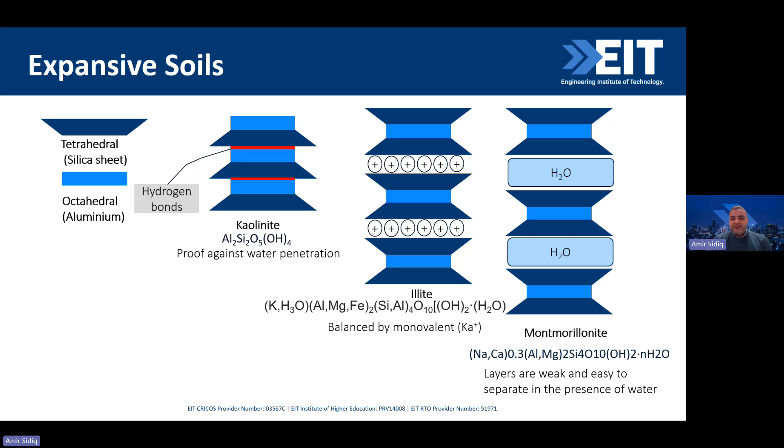So this is a schematic diagram that represents the swelling behavior. Consider we have these different layers or molecules of the clay at their original state. With the addition of water, what happens? These particles of clay get away from each other because the space between them gets filled with water.

Now, considering the same mass of soil, when it's drying, these particles will get close to each other. However, they will not return to their original state. They will still be a bit away from each other, but not as much as during wetting. All of that space will lead to crack development or large voids. So this is the shrinkage issue.

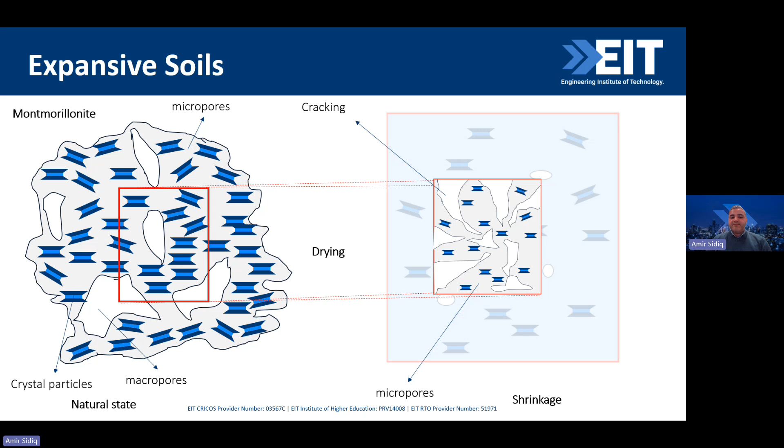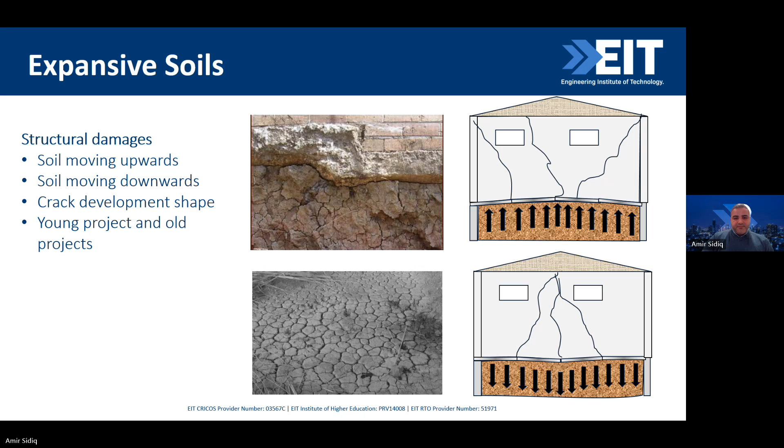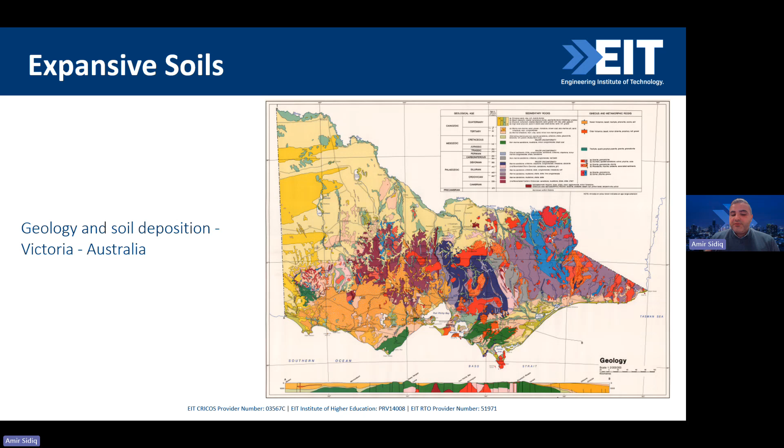Now, these yellow and red areas are volcanic, so I can quickly understand that in this yellow and red area it's expansive clay. In these dark blue areas it's more toward high silt, and in this gray area it's more toward low silt. So it's still highly plastic. We have silt, low and high, but we're not talking about the clay itself. This is a general overview of the legend for the different sections. Now, that's one issue, the expansive clay itself.

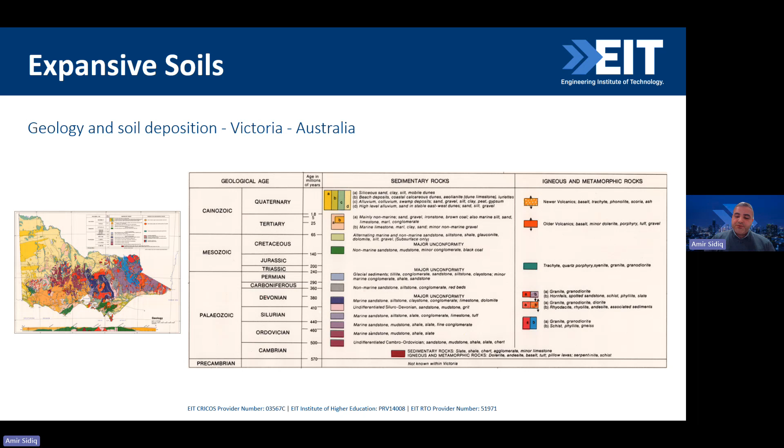So in general, in Victoria we have this expansive soil issue, and that is one of the main reasons we often see a lot of pavement rehabilitation happening, and a lot of construction renovation due to cracking, because the soil is not stable enough. It changes, and all this volume variation is causing these structural damages.

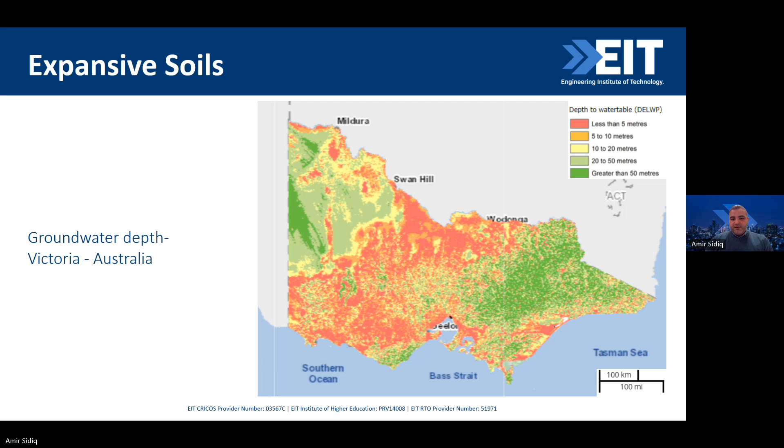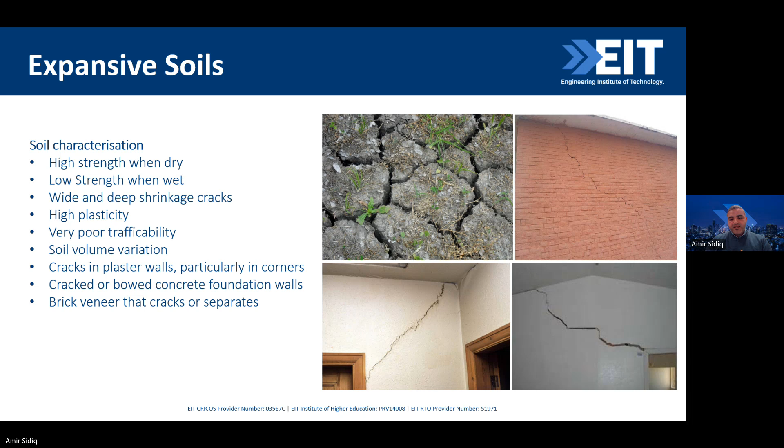So the first thing we need to know is the identification of these particular clays, expansive clays. We have different types of testing to understand the parent material or the actual mineralogy of the clay. So we use the FTIR, the XRD, the SEM, or the TGA, DTA. That determines the type of the clay, the mineralogy of the clay. Some other ones we can just have a look at, for example, from experience when we see pretty deep and wide cracks in the clay, we know it's actually the shrinkage. So this soil is actually an expansive clay.

We also do some other testing regarding these criteria where we have the oedometer test. So basically, we try to find the swelling. What is the swelling range? What's the swelling value? Whether the swelling value is within this particular range, and then you understand whether it's expansive or non-expansive. In some other cases, we have statistical testing. It involves a range of data, and then we do some statistical testing to understand whether this clay is expansive or not. So this is the general idea if you want to prove scientifically this clay is an expansive clay.

Some of the questions we work on in field identification, you actually work without any testing. When you're on site, you basically grab a sample of the clay and you check it. One of the characteristics of expansive clays is that it's sticky and quite difficult to clean from the hand without washing. Now, you might say all clays are difficult to clean without washing. It's not always the case. Some clays you can grab, rub your hand, and get it clean. Not 100%, but you can get it clean. But the expansive clays are very difficult.

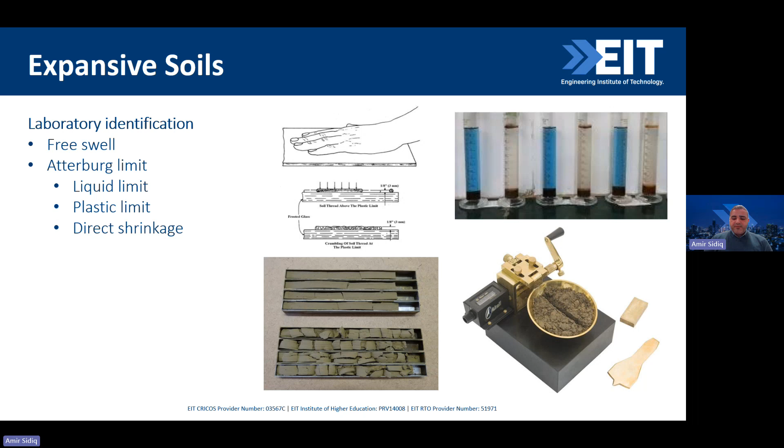So graphically, by using Australian Standard 1726 from 2017, we find the liquid limit, calculate the plasticity index, and then find which classification this particular clay is. If it's CH, basically it's a highly reactive clay. If it's intermediate, it's an intermediate reactive clay. If it's low, then it's a low reactive clay. So this tells us where we're sitting. We can see for the CHs we have a pretty high liquid limit and a pretty high plasticity index. We can straight away see if we have a high plasticity index, it is an expansive soil.

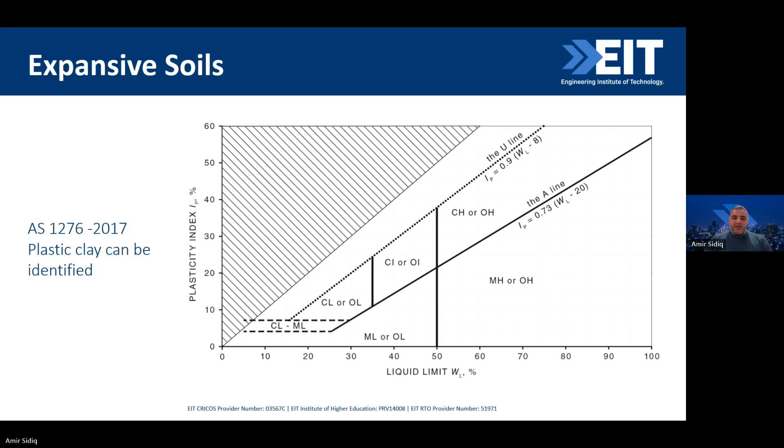Typically for pavement design and pavement technology, there are guidelines where the liquid limit ranges from 50 to 70, from low to high expansive nature. There are plasticity index numbers, and even the plasticity index multiplied by the sieve size less than 425 micron, and then you have the swell as well, in these ranges. So this gives us a hint whenever we're talking about expansive clay in the subgrade; we generally use these criteria to find which nature of expansive soil it's sitting at.

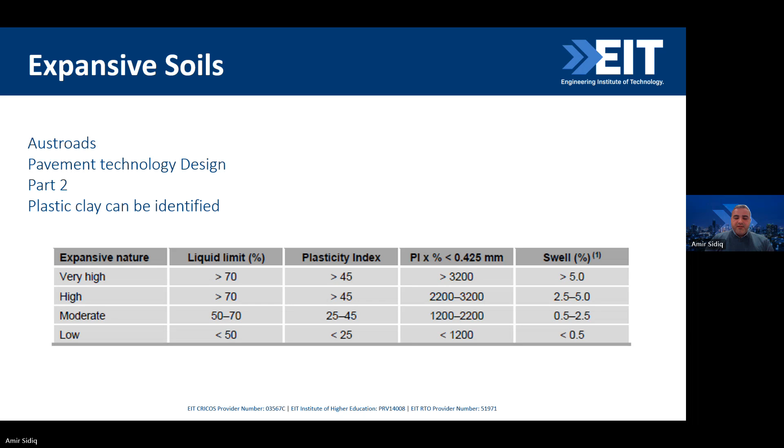Now we're talking about soil stabilization. So far we understand the mechanisms of the soil and the limitations of evaluating the plasticity index and so on. Lime, Portland cement, and fly ash have been used for quite long. Fly ash is still in the research stage, but it has been implemented in the field. They have good characteristics in some cases, but for lime, the permeability varies; it's not always constant, high or low. Portland cement can be quite expensive if you have highly expansive clay. Fly ash, again, in some cases works, in some cases it doesn't.

And then you have recycled glass and recycled plastic, all these five different additives for soil stabilization. Cement is expensive, and all of these are environmentally not acceptable because they contaminate the ground, the clay, or the geotechnical application. So there are limitations in environmental impact, and even for Portland cement there are certain percentages you cannot go beyond because of environmental issues. Now we have these limitations.

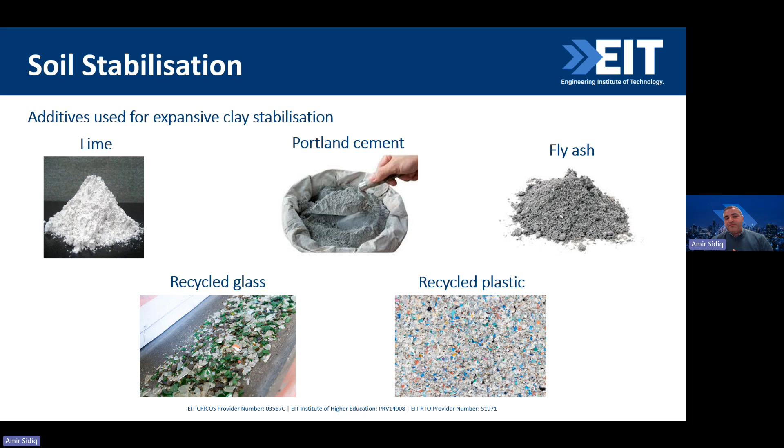However, in enzymatic soil stabilization, the enzyme itself is made from plant resources. So it is biodegradable, but in the long term. At the same time, because it's coming from the plant and we're putting it back into the ground, there are no environmental issues at all.

Some of the specific properties of this particular enzyme: it has a specific gravity of 1.1, boiling point of about 100, and vapor and evaporation the same as water. The odour is slightly fermented, and the pH ranges from 4.4 to 4.8. So it's close to water, but more toward the acidic. The active enzymes are amylase, lipase, and protease.

So why is this enzyme good as an additive in soil or clay stabilization? We know the clay particles have negative charges, as mentioned in the first couple of slides, and positive ions or water bring these molecules together. However, the enzyme itself is positive. So there's a high electronegativity between the clay particles and the enzyme, which makes them bond pretty well, and it works as a protection covering the clay particles from water. It's quite in-depth, but we have done some microstructural analysis and laboratory tests to evaluate these scenarios.

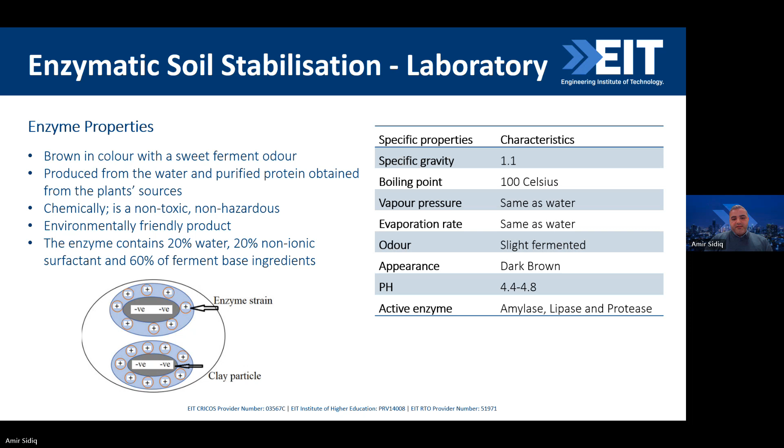Based on one of the laboratory tests, we found a soil material and initially evaluated its characteristics. It is classified as a clayey silt with a liquid limit of 23, plastic limit of 19.6, plasticity index of 3.63, and linear shrinkage of 7.68%. And this is the particle size distribution of that soil.

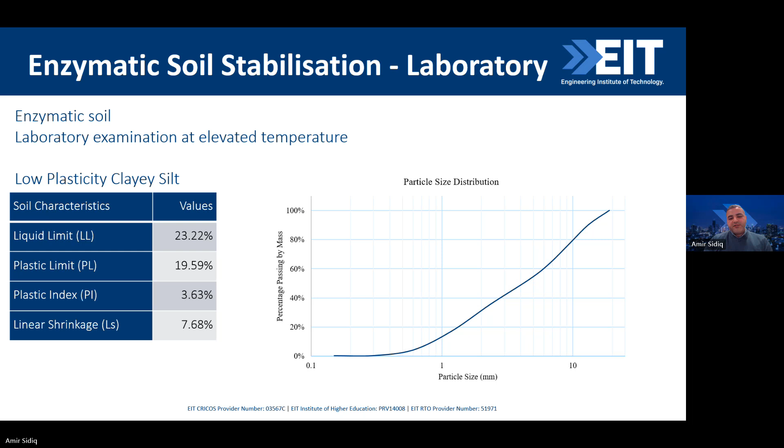The tests I did included a quite deep microstructural analysis using micro-CT. Initially, I did the unconfined compressive strength test, known as UCS, and then the microstructural analysis at 15 micron resolution.

So based on the output of these, I actually did some visual tests: the porosity content, the volume variation of the actual pores, what is their volume and what is their ranges, the shape of these pores, how do they actually change, and the different criteria of the shape, which is known as structure model index. And then, once I knew the structure model index, I went to the orientation, the angle of individual cracks or individual voids within the entire sample.

So this is basically the UCS sample, putting it in the MTS 1000, testing it for the UCS results. And this is basically a smaller version, 1 to 0.08 of the actual UCS sample, to be used for the X-ray testing.

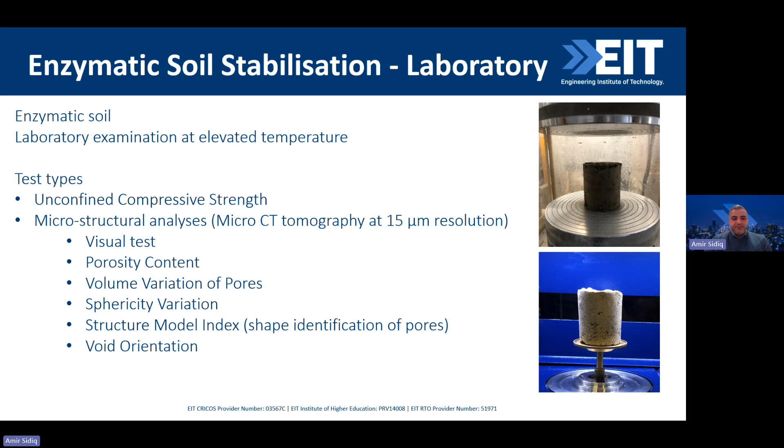At the initial stages, we have to get the compaction. So with the soil compaction, for the raw soil, we can see the moisture content is about 11.6, and the dry density is about 2.02. But by adding the enzyme, the moisture content actually reduced by almost 1.5, and the dry density increased to 2.1.

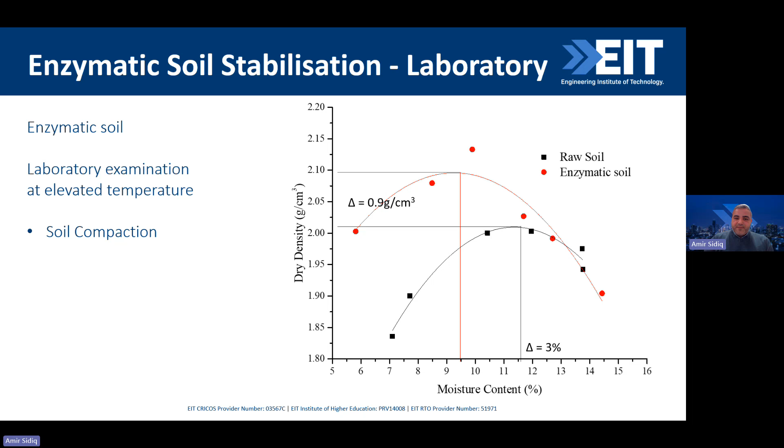Then, using the enzyme and the raw material, I tried to identify the moisture loss within the raw material and the moisture loss within the enzyme material. So you can see the moisture as a gradient. The moisture is getting lost at a much higher gradient in the raw material compared to the enzyme material.

Now, for the test, I used different elevated temperatures. So it was like 0; basically, I froze the samples for the raw material and the enzyme material. And then I used the different samples at 15 degrees, 30 degrees, 45 degrees, and 60 degrees. And I did the entire test, including the unconfined compressive strength and all of these microstructural analyses.

Now, I wanted to understand how the enzyme is behaving when it's experiencing the different temperatures, because we have different temperatures in Victoria. We want to see, in high temperatures and in low temperatures, what the enzyme is going to do, whether it's going to be improved or not. So I used this particular scenario of different temperatures.

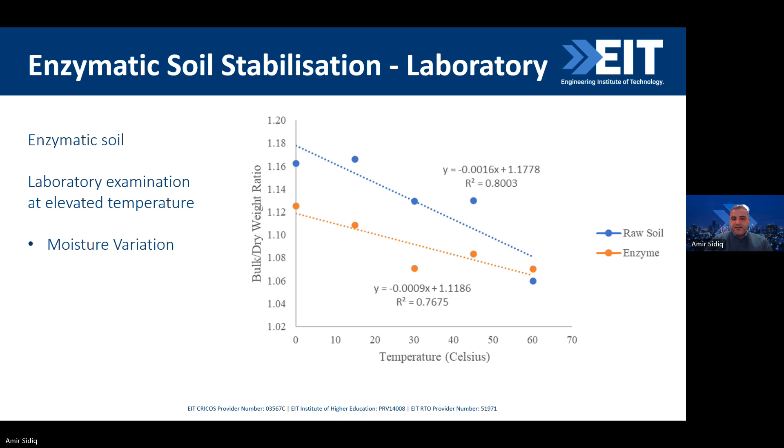Then, based on the unconfined compressive strength at the different temperatures, we can see the enzyme is basically having a reduction compared to the raw material. But at 15 or 30 degrees, it is almost consistent with the raw material. At 45 and 60, it slightly reduces. Now, that could be because the soil is not a consistent material, it's a non-homogeneous material, so it could be an issue there.

However, even though the strength is slightly reducing, we got the cost saving of the water and the strength development. And we're going to go through, in the next slides, the behavior of the enzyme protecting the clay particles, which is much more important compared with this very small amount of strength reduction.

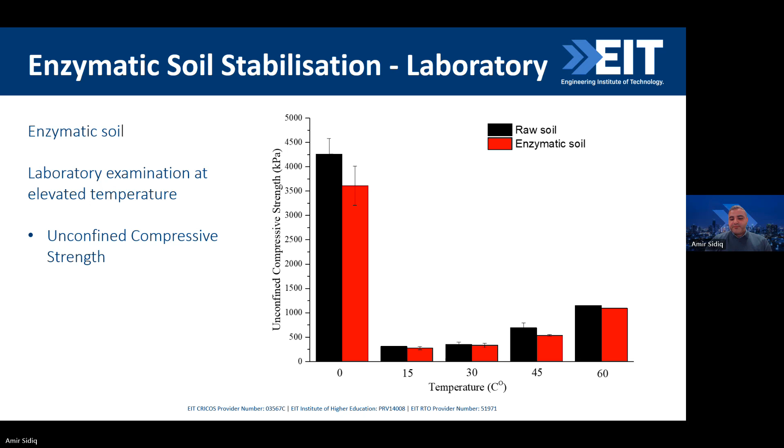So using the micro CT, the very first thing I tried was to get the sample to separate the void and the solid, and then combine these two together and develop a 3D section. So here we can see the red spots are the void, and the light green ones are the solid. This is for the raw soil, and this is for the enzymatic. And then you have the different temperatures, from 0 to 60 degrees at 15 Celsius intervals.

Now, for 0 Celsius, we can see here, for the raw soil, we got voids in the shape of cracks, or rod-like. So it is lower porosity in this case, but for the enzymatic it is much higher. But we don't always want to have low porosity in the soil, because in some cases we need to have these particular pores.

Even though it's expansive soil or clay, we need to have this void to be able to equilibrate the material behavior. So here, for the raw material it's actually low, for the enzyme it's slightly higher. But then at 15 degrees, the void for the enzymatic is actually increasing slightly. Relatively, it's also increasing for the raw material.

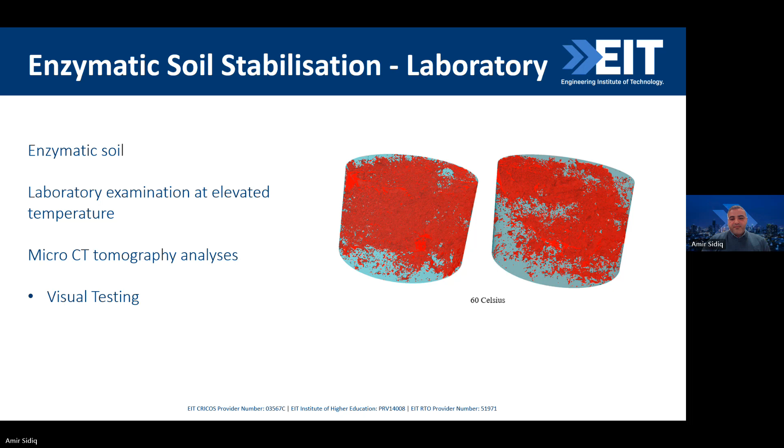But the difference between the two values is always significant between the raw and the enzymatic. Again, this numerically proves the use of the enzyme is pretty good when it comes to the porosity content at the different elevated temperatures.

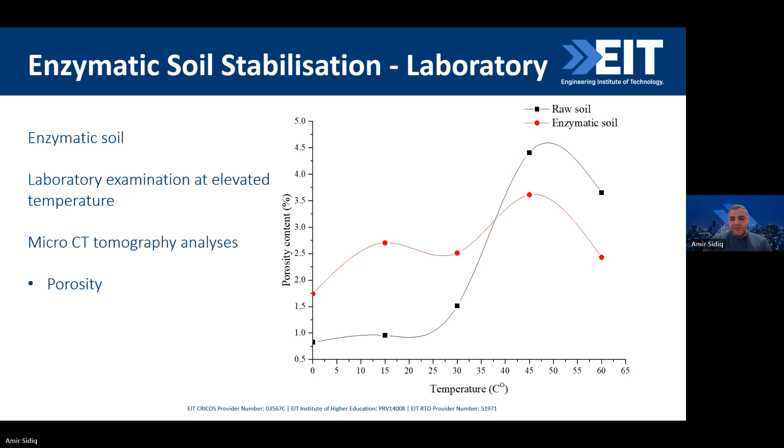Then here are some of the individual pore sizes. So this is for the control or the raw material, and this is for the enzymatic. Here we can see this is the particular volume size, and this is the frequency. So how many voids of this particular size are there, for every pore within the entire sample.

Then you can see here for the raw material, the frequency is going pretty high at different temperatures. And this is the same sample, just experiencing different temperatures. For the enzymatic, it is still increasing, but at the same time, this increment is pretty similar. It's almost consistent. Again, it's controlling the behavior of the clay materials.

Then here I did some of the sphericity variations. When talking about sphericity, basically a perfect sphere has a value of 1, and then it reduces. So something like this basically has 0.001, depending. These parameters are commonly used for bone density in biomedical engineering, and I applied those parameters to the voids within the soil or clay material.

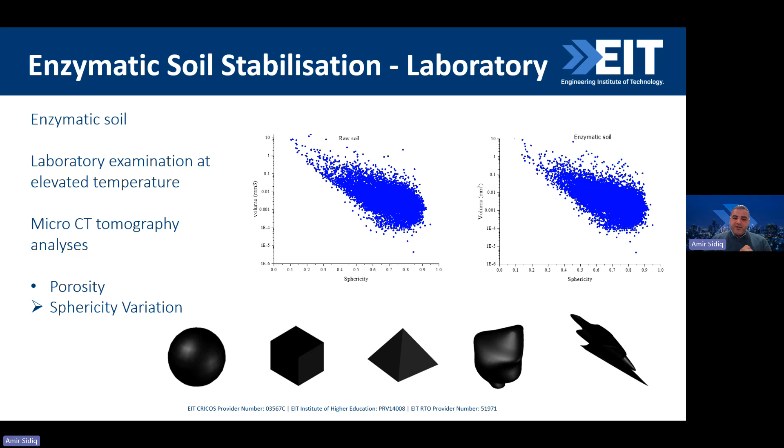It's quite difficult to actually analyze, even statistically. So here, the best thing to be done is actually use the probability density function. So it's a density function, it's not actually the probabilities. That's why you got more than 1 as a probability. And then this is for the raw material and this is for the enzymatic.

So you can see here, the probability density is actually decreasing, and the shifting of the center of these curves is actually moving towards 0 as the temperature is increasing for the raw material, which really means the spherical shape of the pores is becoming less spherical. And definitely when you have less spherical, we're not actually looking at something good.

The more spherical, the better mechanical properties, because a perfect sphere basically means perfect equilibrium forces. If there's a crack or pressure happening within the sphere, then because the sphere is perfect, the equilibrium forces will actually repel all these forces. But if something is becoming less and less spherical, then there's a weakest point or the weakest stresses. So we're not looking for something like that.

For the enzymatic compared to the raw, we can see this variation is actually pretty constant at the same for different temperatures, clearly showing it's controlling the shape of the void from moving from this spherical value of 0.7 or 0.75, for example, towards 0.

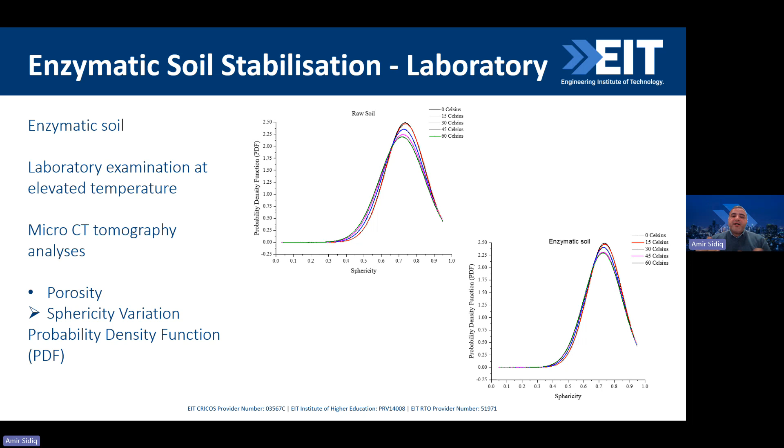So it's trying to control the shape of the void, which is really something we're looking for, because when the external forces are applied, the repelling forces are quite good, which actually protects the structural behavior of the clay particles. I also moved all those voids into different analysis.

Now, structural model index is basically when we have a plate-like. So plate-like, we have just a crack. It has the X and Y values, but then there's also a Z. So it's a plate, a 3D crack. Rod is basically where the Z value is very, very low, but then X or Y are actually inversely related. So these are rod-like shapes. And 4 basically means a perfect sphere.

Again, these parameters are coming from biomedical engineering, and when they test human bone to understand the strength of that particular bone, they actually use these parameters. So now I used these parameters for the actual pores. We can see here for the raw material, the frequency is actually increasing at different temperatures.

Again, they're ranging between rod to spherical. We don't have plate, pretty big cracks. But then for the enzymatic material, the frequency is almost constant. And then it's slightly moving toward 3.5, which is going toward the spherical shape. But the actual frequency is almost constant.

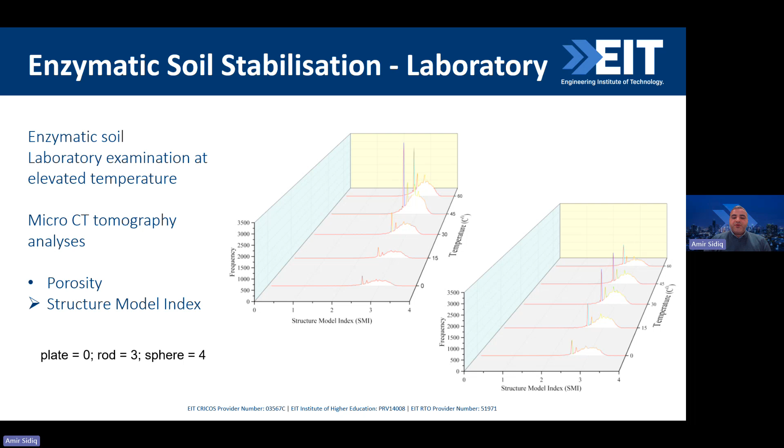So we can see again from the different parameters or the shape variations, the enzyme is still actually controlling these voids or the actual clay particle properties. The final thing for the laboratory work here is actually using that structure model index and then finding the orientation of each of these voids within the entire sample.

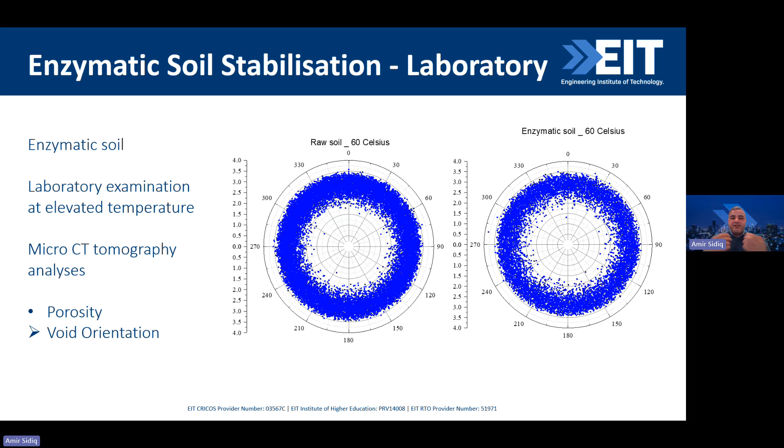As I mentioned in my first slide, the shape of the clay, or the distribution of the clay particles, will actually be varied. By using something like this enzyme material, it actually controls this variation, which is controlling the swelling, controlling the shrinkage, and then we have the structure stabilized, not experiencing these different mechanisms downward or upward. So we have a good understanding of this material at the laboratory scale, then moving to the field.

So here, there was a work in the northern area of Melbourne, which consists of about 34,000 square meters. We have some statistical information, the annual rainfall in the area based on the Bureau of Meteorology. It's about 601 millimeters annually. The maximum temperature is about 20.8 Celsius as an average from 1991 to 2015. So we need to understand background environmental information, such as the temperature and rain, because they all contribute to the shrinkage and swelling of this expansive clay material.

So this is the location of the site, and this is the existing state of the site. We can see it's quite high fill. The clay is actually quite uneven, and it's different types of soil. But now we can see here a black soil, or dark gray. So that really indicates this could be the expansive clay.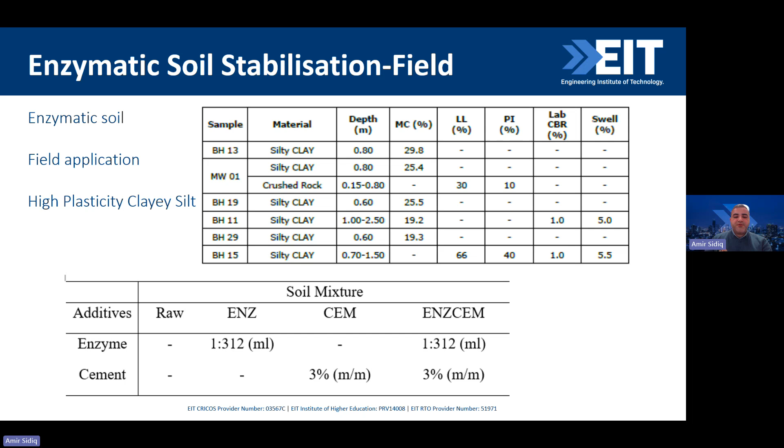Then using the enzyme by itself at a 1 to 312 ratio, which is every 1 ml of the enzyme used for 312 ml of water dilution. And then for the cement one, we actually use 3% cement. Then we have the sample of the enzyme and the cement together to test before going to the field. So we want to understand the soil behavior with the enzyme, with the cement, and then with the combination of these additives for that particular soil material from the field.

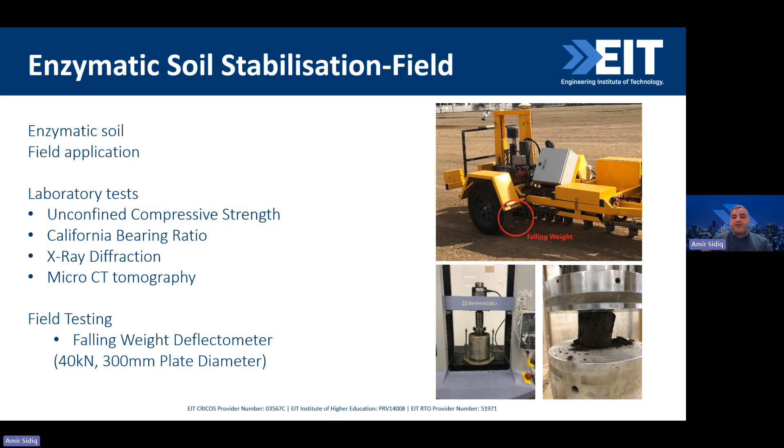The test we took here is the unconfined compressive strength. It's a general test to understand the strength of the soil, the California bearing ratio, known as CBR, the X-ray diffraction, micro-CT tomography, and then we also did field testing, which is the falling weight deflectometer. This is a very precise field test, and it's quite expensive in general, but it actually provides very good deflection data throughout the entire site.

So using these four different mixes, we have the raw, the enzyme, the cement, and then enzyme added with cement. You can see for the cement and the raw materials, there's a very small difference in the moisture content, and even for the dry density. But when we're using the enzyme itself, it's reducing the moisture content, and it's actually increasing the dry density quite high compared to the remaining mixes. You can see the impact of the enzyme in this case.

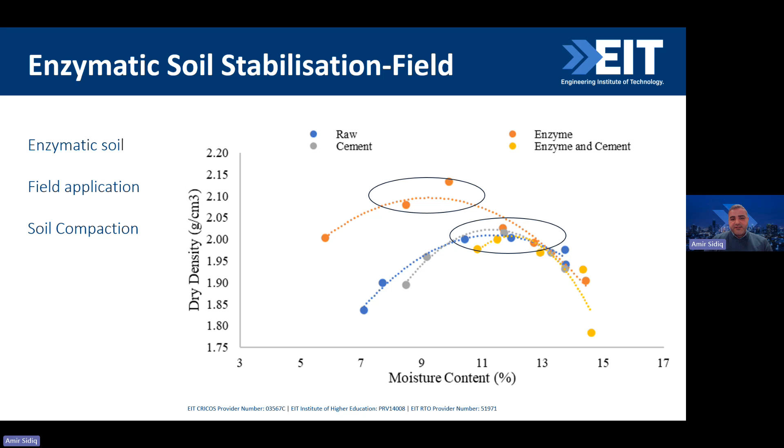Use of the unconfined compressive strength. We have the raw. The enzyme is slightly lower, but again, depending on the soil, because it's a non-homogeneous material, so we cannot really say this is the 100% effect. It's slightly lower, but it's only about 2-3 kPa. Cement, of course, when adding cement, it actually increases the strength significantly because of the properties of the cement. Then we have the enzyme and cement together.

Now, the question here could be why enzyme is added to cement to reduce the strength, where the strength is actually pretty high. That is exactly right. However, when we're dealing with different environmental conditions, the protection of the enzyme, we obtain this information, this analysis, quite deep analysis from the laboratory. Now we need to protect our clay against different environmental conditions. So we use enzyme in that case.

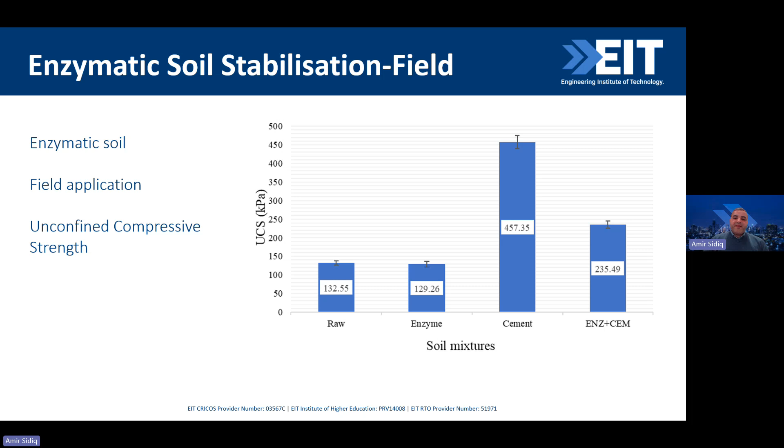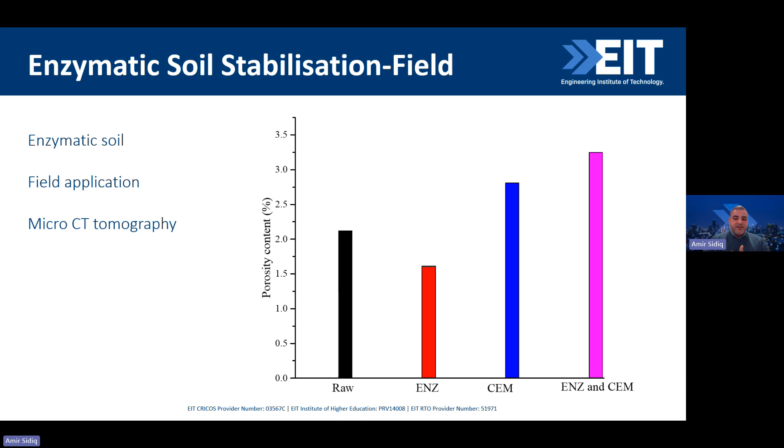Then we did some field tests. So initially we stabilized the site at the first 200 millimeter thickness using the enzyme and cement, and we did falling weight deflectometer tests at different spots. They are about 10 meters apart as a grid, and we did some of the tests in this condition as well to understand the actual behavior.

Again, having a site of about 34,000 square meters, and we're talking about microns of deflection, we're looking at very precise information, very precise analysis across the entire site. So we saw some of these, and we have about 2,000 microns, and our aim was actually to get almost all of them across the site to less than 1.5 millimeters

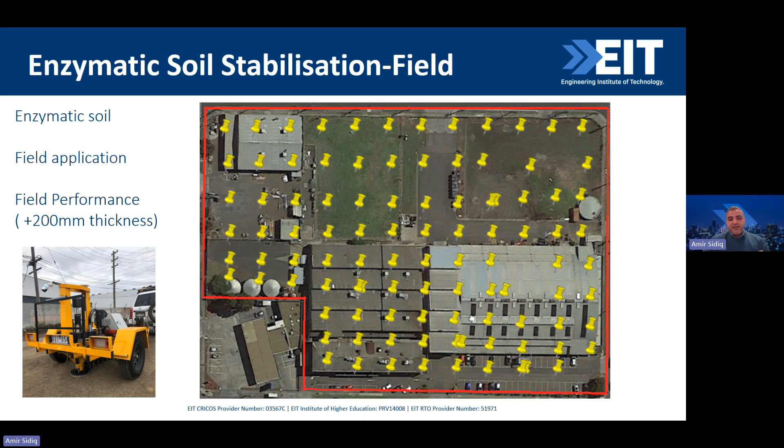I think there were only about 2-3 locations across all of these locations which were about 1.6 millimeters, but the remaining were absolutely below 1.5. So just by using 400 millimeters thickness stabilization using enzyme and cement, we actually hit the target of less than 1.5 millimeters, and we're talking about 34,000 square meters. It's quite large. And I'll tell you what was built there.

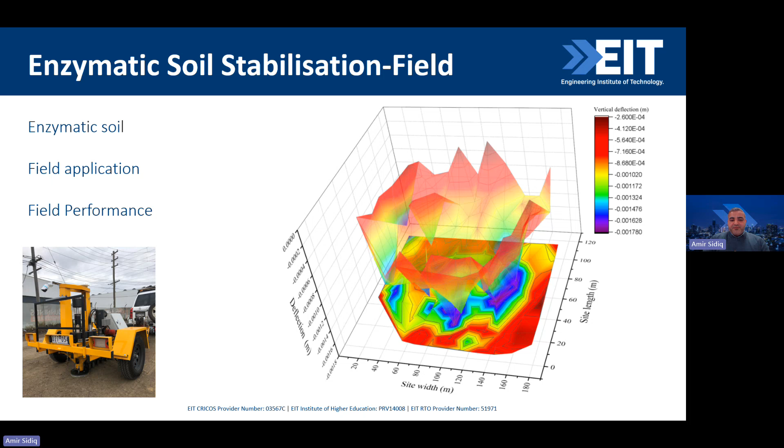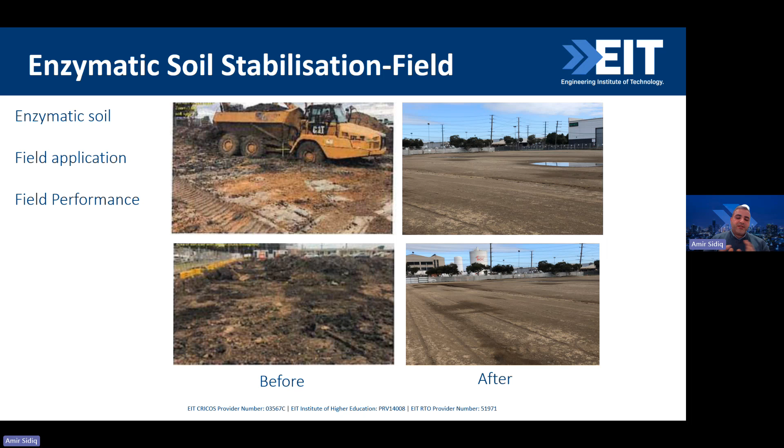So those were the existing conditions. You can see this construction vehicle is almost stuck because of the clay behavior, and then after stabilization it became nice and smooth. It looks solid, and I did pass by this site a couple of times, and they actually used a crane in this area for the construction. So even without the base, it was very strong.

Now, why did they use it? So that was the initial state, and now it's actually a Bunnings. That site was used for a Bunnings construction. And Bunnings, we know, is an industrial building. So in some locations there are actually pretty high loadings.

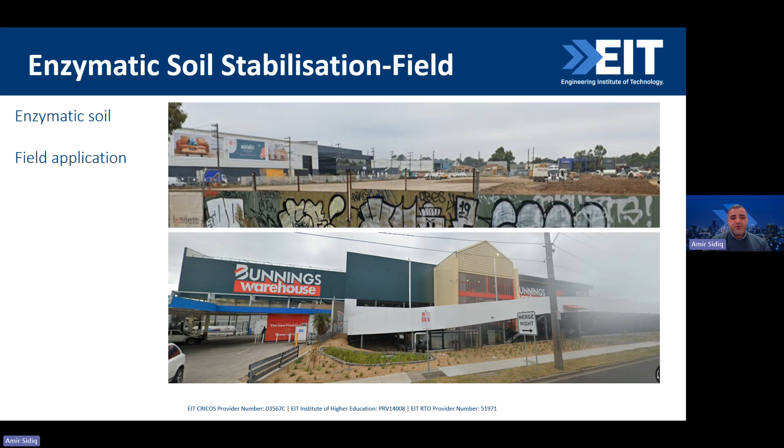Other methods, where they just spray using the tank, for example just mixing the enzyme with water and spraying, do not distribute the additive equally throughout the entire site. So there are different instruments and equipment used on site for perfect distribution of the additives, particularly when we're talking about liquid additives.

Another site is about 65,000 square meters, also using the enzyme. It's located in the southeast of Melbourne, for white goods. Again, it was pretty nicely stabilized using just the enzyme and a very low content of cement.